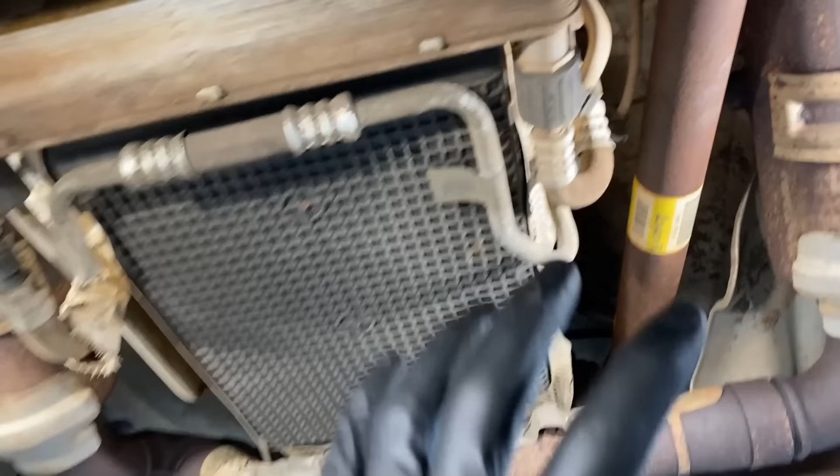All right, first things first, safety. Before you crawl underneath the vehicle, you wanna make sure the vehicle's in park. Use chock blocks, it'll look a little something like that. And then you can generally just slide underneath the vehicle and get underneath here on the trucks, F-150s, Transit vans, maybe even the Ranger, Expedition, and just get to work underneath here, okay?

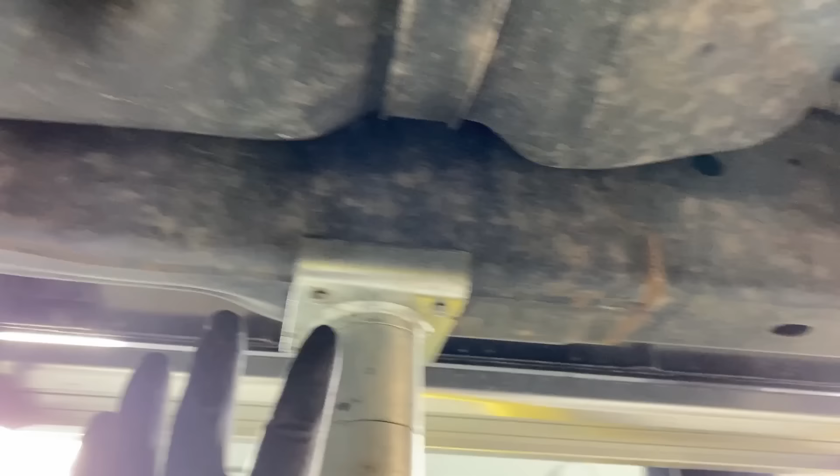If you insist on jacking up the vehicle and having it on jack stands, working on a Mustang, something like that, make sure you put jack stands at all 4 points in the vehicle. So for a frame-based vehicle like this, right here, back here before it arches up, and the same thing over here and over here. Whereas the Mustang, you'll have jacking points in the owner's manual, but basically right around here. Here's the front of the fender here, comes back a little bit, and you'll see a notch in the unibody right there, and you'll jack it up right there on the Mustangs, okay?

Real quick, before we get started, let's go over the differences in the service procedure depending on the vehicle model and engine that you're working on. Yes, the engine matters. So in 2017, when the F-150 first got this transmission, first year for it, it was fairly simple to service the trans no matter what engine you had, okay? You simply had to come in, remove this heat shield on the side here, one here, one here. It's a split design, so it's very easy to take off. These 10 mil nuts right here hold them on, wiggle them out of there, unbolt the pan, service the trans, done, okay?

That all changed in 2018, except for the Ford Raptor. The Raptor was serviced exactly the same from 2017 through at least 2020 and probably beyond. So if you have a Raptor, it's very, very simple to service your trans. Same thing as the 2017 guys. In 2018 with the F-150, it got much more complex, okay? So all of them now have this massive cooler design installed on them, okay?

This big cooler monstrosity on the 5.0, the 2.7 liter Eco, and the 3.5 liter Eco, okay? We need to get all of this out of the way as we're gonna show you here today. We need to drop the sway bar down and get it out of the way. We need to pull the heat shields off, the NVH shield that's up inside of here and clips in right about here. All that stuff just to get it out of the way. On the 2.7 liter and the 3.5 liter EcoBoost, that's it though. You get the cooler lines out of the way, sway bar dropped down out of the way, and you start unbolting the pan to service it.

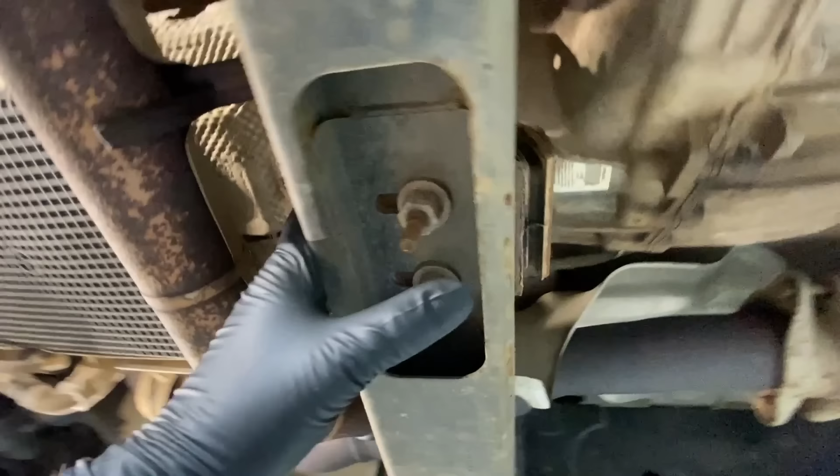Now the 5.0 liter, as you see here, has this monstrosity of coolers and everything. We need to pull the sway bar, the cooler, the lines, everything. But we also need to remove the transmission mount, okay? We have to unbolt it from the side of the transmission here on both sides. We're gonna unbolt this one exhaust bolt right here. I'll show you guys in detail. And then we're gonna lift the whole powertrain up an inch or so just so we can snake the pan down and past the exhaust right here, okay?

In 2018 and on, the Ford Expedition and the Lincoln Navigator received this transmission. And theirs is very similar to the 3.5 liter version of the F-150, okay? So you have to pull all these cooler lines off and the cooler and these mounts and pull the sway bar down. But again, you don't need to lift the trans to pull the pan, okay? And that's 2018 and on. The Mustang and Ranger, stuff like that, those ones you don't need to lift the transmission either, and they're fairly simple to pull up. The F-150, of course, is the worst.

In 2021 on the F-150, the procedure is basically the same, except there is no cooler here. So there's cooler lines you need to detach and kind of get out of the way, but there's no cooler monstrosity here to take out of the way. You still got to lift the trans on 2021 F-150s, but the cooler design has been eliminated, so it's a little easier. Anyway, let's go ahead and get started on this one. Like I said, the 5.0 is the worst one to do, and this will give you a really good idea how to maintain your vehicle no matter what model and engine you have with this transmission in it.

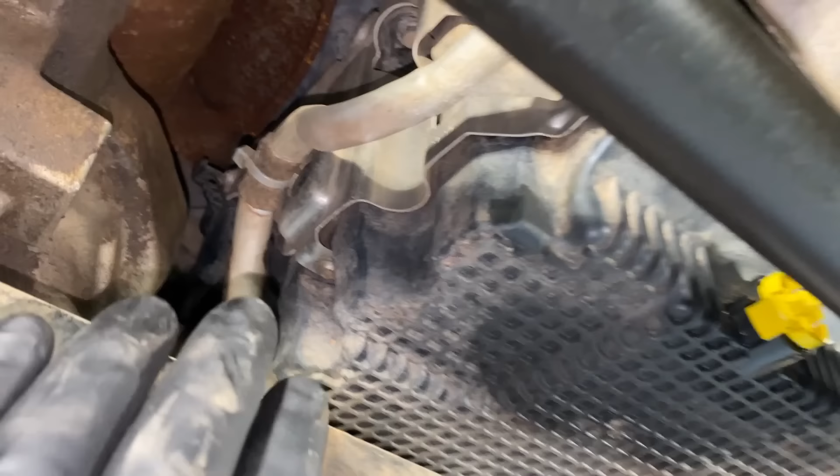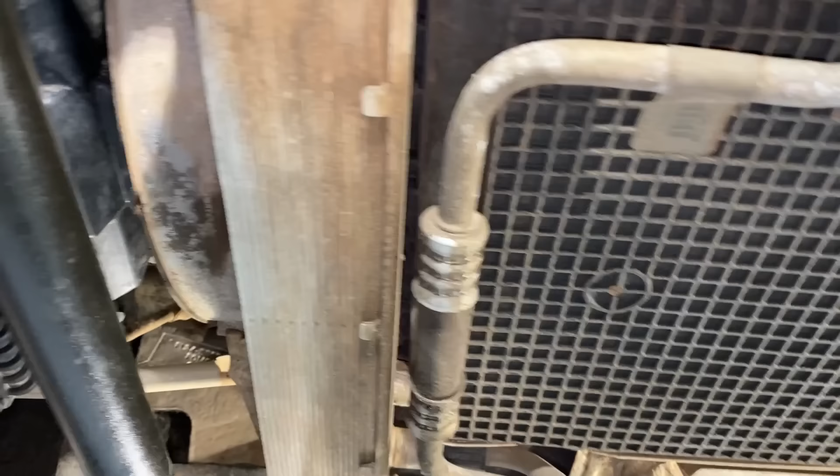You're going to see different attachment points, like right here on the side of the pan is very common. There's little push pins right there, kind of pry them off of there. And then a lot of times the cooler lines will be attached to the bell housing either by a nut or by a bolt, like a bell housing bolt right here in the 5.0. You want to take those bolts out and get the lines loose. Now the cooler, if you have a cooler on here, you're gonna have a 10 mil bolt right there and right there. Take them out, okay?

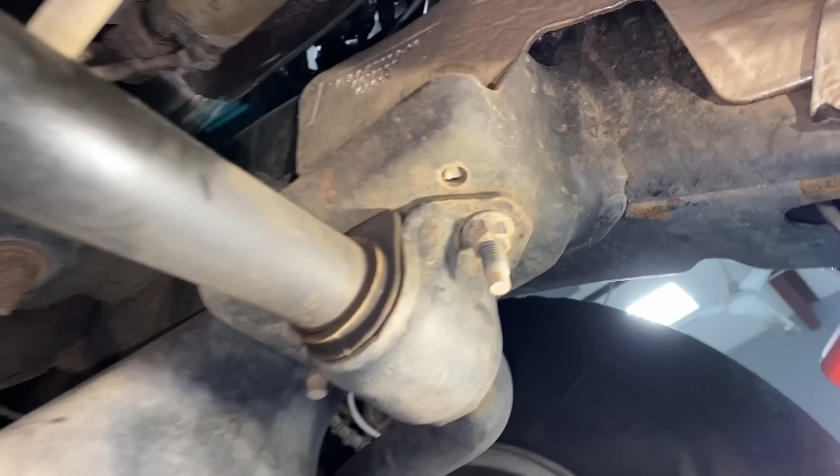Then if you have a cooler also, you need to get the sway bar out of the way. We're gonna droop the sway bar out of the way and we're gonna droop the cooler out of the way, okay? So at this point, if you have a cooler on here, let's go after the sway bar. The sway bar has 15 millimeter nuts on them. You can see them right there. So you want to get 3 of them out and then hold it so it doesn't bonk you in the head and then zing that last one out. Hold it, slowly lower it, and it'll just kind of rest here. Same thing with the transmission cooler and all these different lines.

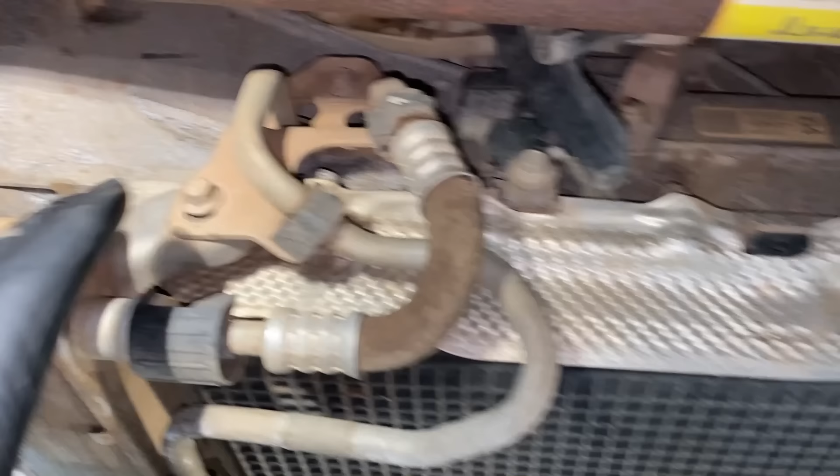They're going to be unbolted and just kind of droop and lay there out of the way, okay? So the last 2 bolts that hold in the cooler and all these different lines that's set up like this are the bolts up here. There's a 10 mil right there, and there's a 10 mil up there to hold this bracket, which actually holds the 2 lines in the side, okay? So we're gonna take these out last.

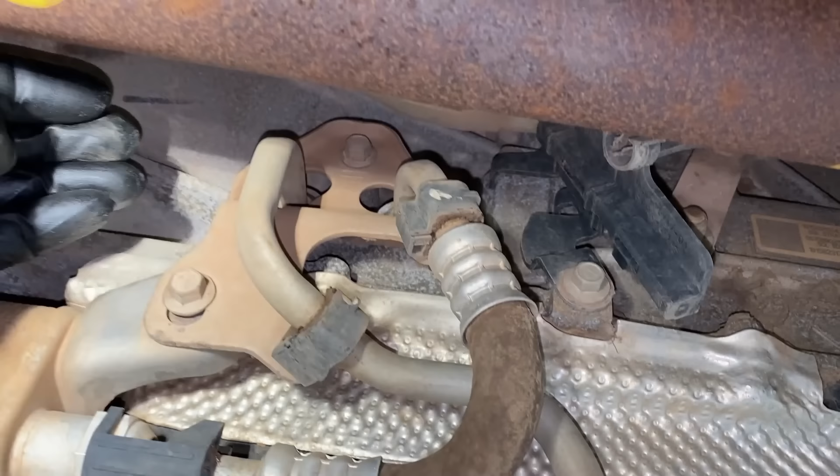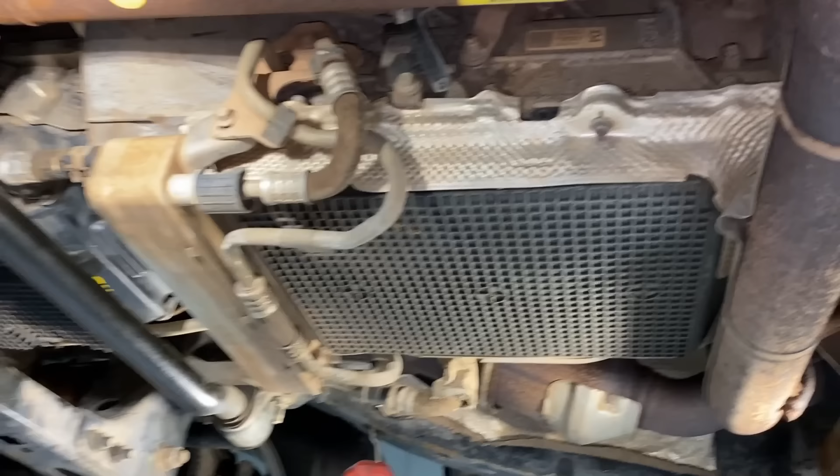Before you take them out, I suggest you get some compressed air up in here and clean it really well around those ports, and then unbolt these, wiggle, wiggle, wiggle, pull them out, and this whole thing is gonna droop to the side. Lots of fluid's gonna come out, so be ready. Then we're gonna go after these heat shields on here. Again, just 10 mil nuts. Just follow them all the way around, and then they come out, no big deal.

And then, again, for the 5.0 models on the F-150, and I believe some 2021 models, we're gonna have to lift the rear of the trans up so we can sneak the pan out past the exhaust there. And I'll go through that in detail, but basically we're gonna pull up this bolt right here for one of the exhaust hangers, and then we're gonna go after the 2 bolts, see them right there on each side of the trans, lift her up, and then we can start unbolting the trans and dropping it down and draining it out.

So first thing I'm gonna go after are those retainers on the side of the pan here. Cat claw works best. Looks like this one was popped off of here already because they changed the pan for the all too common oil pan leaks in these engines. All right, so cat claw for the win there. And then we're gonna go after that 13 mil up top there and get that out of there. I know you guys can't see all of this, but the general idea. It's all pretty simple. It's just access.

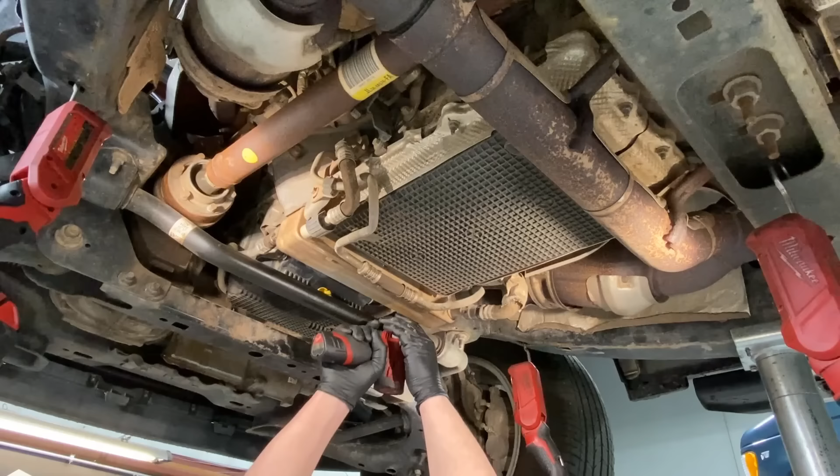All right, so get our 13 mil bolt out, and you can see this line is nice and loose now, so the whole thing can droop. We'll keep all these bolts and stuff like that together. Let's go after the cooler itself. Get that out of there. 10 mil bolts. You can see everything's starting to loosen up on here. All right, so everything's kind of loose.

All right. Like I said, we're going to keep these guys in for right now, and we're going to go after the sway bar. Next, we are going to remove the cooler lines from the side of the transmission. So you can see this one's kind of muddy up in here. You want to use some compressed air all up inside here for a really good cleaning before we actually pull them off there. I already did that on this one, got as much as I could off of there. So we're going to go ahead and pull a 10 mil bolt out.

I like to at least loosen this one because going back together, you want to mount it up to the trans, nice and even both sides, and then tighten this one last so you don't crack the mounting boss on here. So I just loosen this one for now. They can come down together. And then up in here, there's another 10 mil single bolt that holds the cooler lines into the side of the trans. And it's going to be full of Loctite. These suckers are full of Loctite. You see it on there? So it's going to be a little bit hard to get out of there.

All right, now before you just yank the lines away, it's going to be a good amount of fluid coming out of here. So be ready for it. Drain pan down below. And we just got to wiggle and pull at the same time. There we go. Got one line out. And there you go. That's not too bad. But the idea is we want to be able to move it side to side as needed to get this pan out, sneak it out, so it's going to be tough. And you want this down and out of the way.

What do you guys think so far, huh? These are much more complex and involved than the old 6R80 transmissions everyone complained about when they first came out years ago. So now at this point, what I like to do is clean up a little bit.

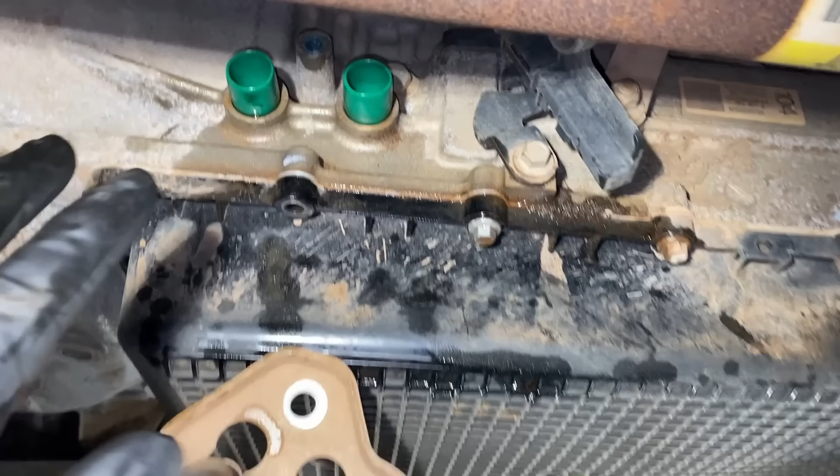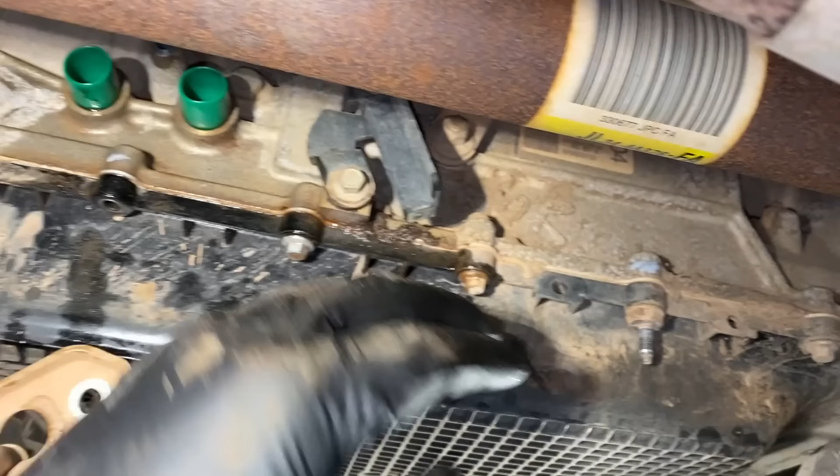So what we'll do, if you pulled off your lines, is I'll cap off the ports in the side of the transmission, and I'll cap off the lines on here so we're not introducing any dirt. And I like to clean up a little bit. We're going to clean with compressed air all along the gasket surface on here. You can see there's mud and everything up inside of here on this vehicle. So you want to clean it all the way around so it's good to go before you break the seal on the transmission. Same thing on the driver's side here.

Right there is the fill port. We're going to loosen that and pull the cap and the dipstick out later on. So you want to get your compressed air up in here and clean it up in here too before we pull that off later on. Okay, so it's time for a little bit of cleanup, and then we're going to go ahead next and unbolt the transmission and lift it up for the 5.0s.

One final step on the 5.0 models is to actually unbolt the transmission from the vehicle, okay? So this applies to the 5.0 models, and I believe all the 2021 F-150 models. That's still to be determined, but that's the way it's looking. The way you do this is you come back here, and you look up, and here's the transmission cross member, and there's a 15 mil bolt right there. So you get a universal in here, and an extension, and you just turn it right out.

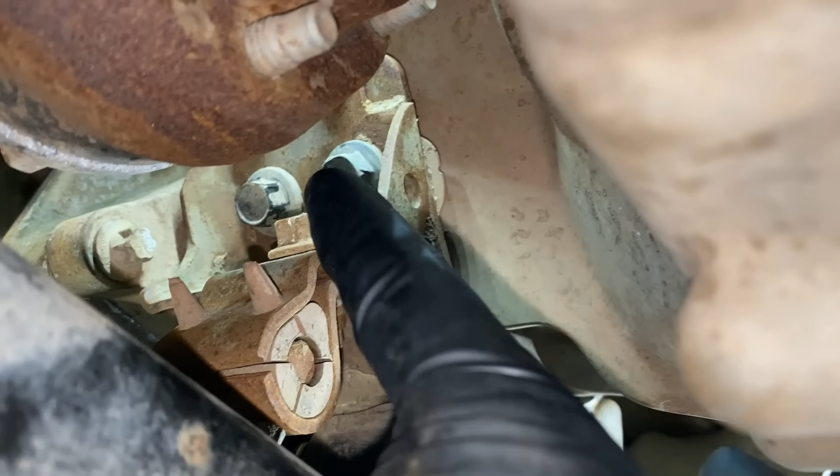On the back side here of the cross member, in order to get to this bolt right here to unbolt the trans, you need to unbolt this bracket for the exhaust. Another 15 mil right there, and a flex head GearWrench is best, and it'll come right out. Get the bolt and the plate out of here, and then same thing. Extension and swivel, get up in there, 15 mil, and take that bolt out.

On the passenger side, same deal. It's just a little bit more open over here, okay? We're simply going to take these two bolts out. So I'll break torque on them, just kind of wrench them out back here, and it'll be good to go.

Once all those bolts are out, you're simply going to lift it up. You're going to use a jack and a block of wood, and that block of wood's going to go right in here, behind the trans pan, on the metal. The case right here. See it right here? Block of wood up in there, and we're going to raise it an inch or two.

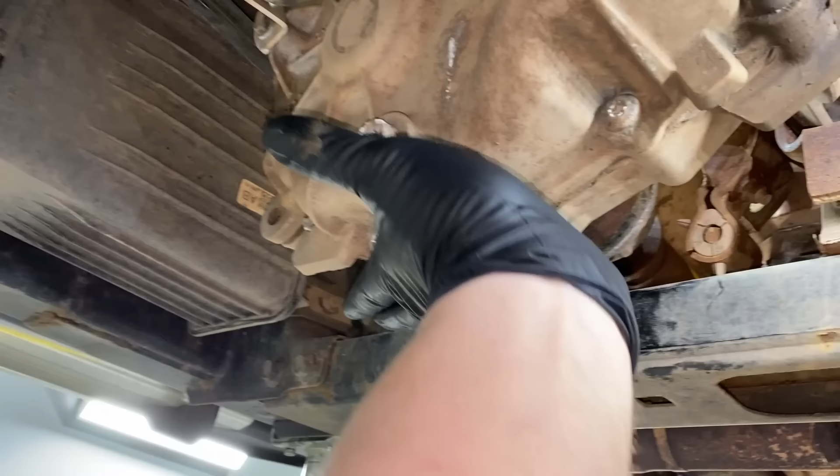What I'm going to do, as we've been doing for years, is lift it back here on the transfer case. We're only going up an inch or so, we're only lifting so much weight, and it'll be just fine, okay? Either way, we need to lift it, and the reason why we need to do all this is we need to create a gap between the exhaust here and the pan.

This pan needs to be unbolted, drop down a little bit, move forward, and get out, okay? You can see it's tight up in here, so we need to create a gap. So with this method, we're going to leave the exhaust where it's at, and we're going to lift the trans and create that gap in the 5.0 models, and I believe all of the 2021 F-150 models. So I'm going to go ahead and create ourselves a gap. I'll show you guys before we start pulling the pan off how it's all going to look in the end.

Once you have the transmission unbolted on both sides, you can safely jack it up about an inch or two. Like I said, I use the transfer case back here. I've been doing that for years on different Ford vehicles, but they want you to jack it up right here at the case, where it's nice and beefy. But in the end, it's going to give you that gap like that. So the transmission went up and the exhaust stayed the same. And that gives us just enough of a gap so we can unbolt the pan, drop it down, go forward, and get it out of there.

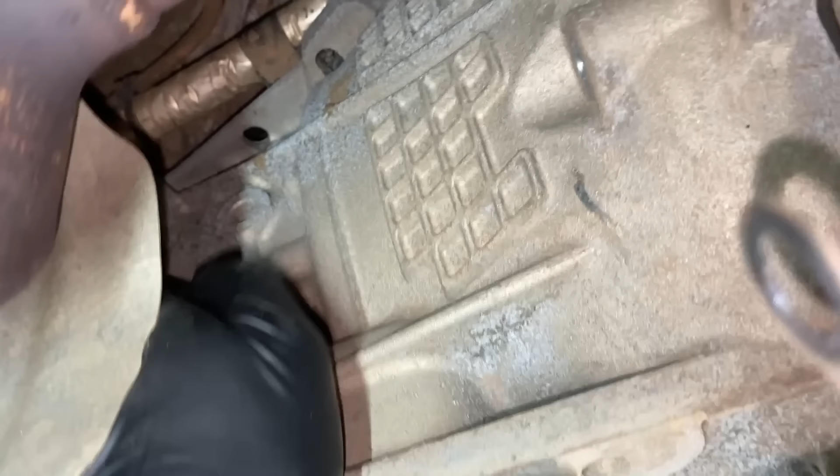All right, at this point, you want to go ahead and remove the fill plug. So you put a 19 mil wrench like this, tap, tap, tap with the hammer, and once it's loose, you can simply unscrew it, like this, and there should be no spill out. Pull it out, and the dipstick and the cap come out. Put it off to the side. Now we can start unbolting the pan. I get the stud bolts out first because they're a different size, 13 mil, and then I go after the 8 mil trans pan bolts.

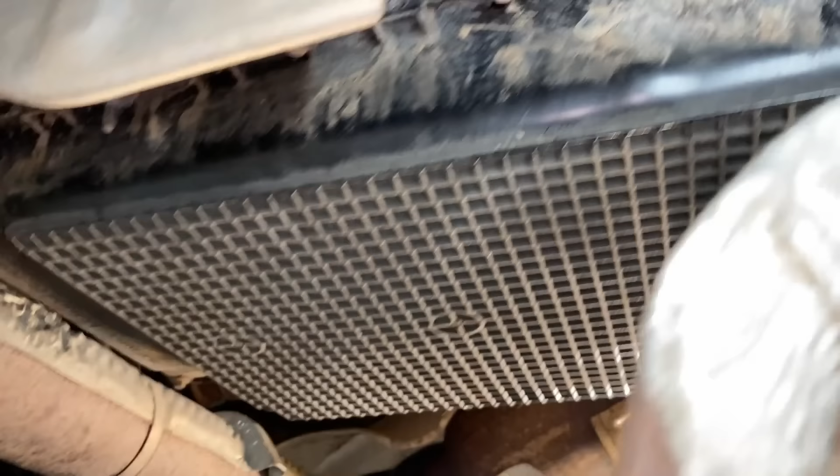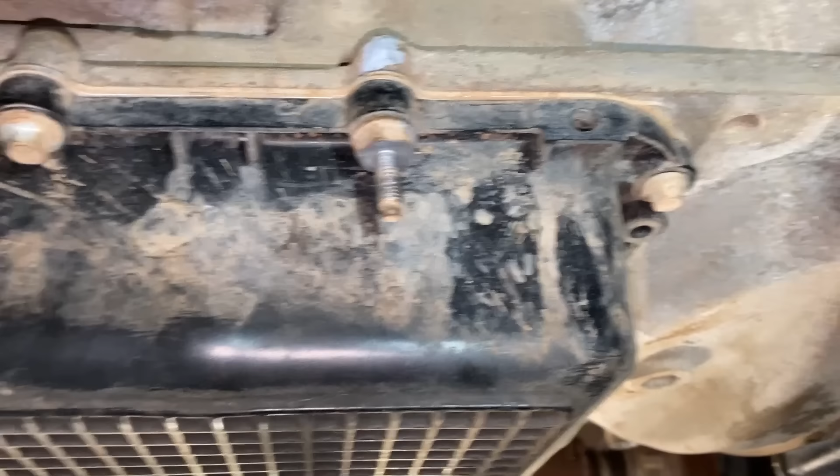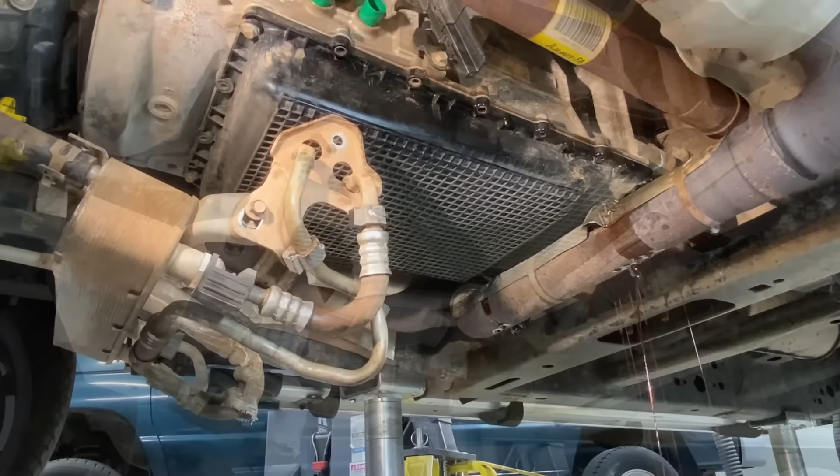At this point, you can see we have a nice controlled drain. It's pretty much done, and we can start loosening these two front corner bolts so the back end can drop down a little more. We get as much drained out as possible before we start pulling the whole pan down in our hands. You don't want to take a bath of this stuff. Bottle's got a big skull and crossbones on it. Danger.

Oh, I forgot one over here. That makes a little more sense. These last ones are good to do by hand. See that controlled drop of the pan. Looks good. I like to hold the pan up like that and let it come down slowly. Drain, baby, drain.

Now we're going to pull you back a little bit so you can kind of see this next procedure. We have the pan drained. We're going to pull the last two front bolts out, okay? And it's gonna be in our hands at that point. But still, it's not that easy to get out, especially with this monstrosity in the way. So we're gonna drop it down. You gotta kind of angle it and pull it out of there and still snake it past the exhaust,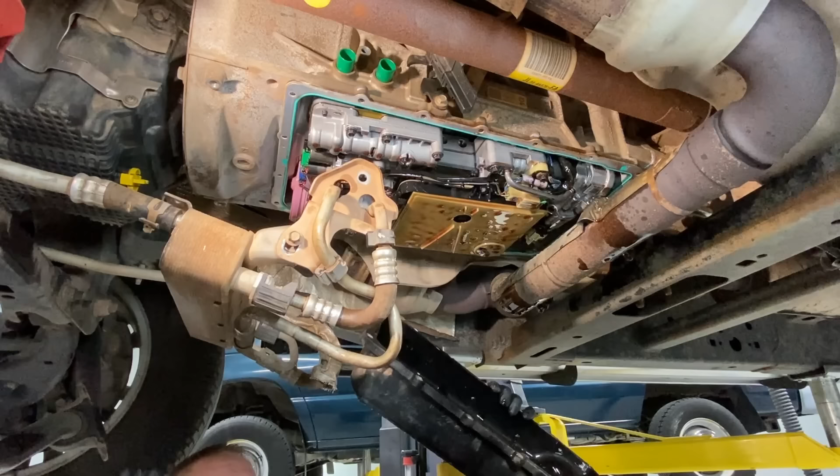Now that we're past the exhaust and we're at an angle, we need to come down and away from the cooler. And that's how you get out of there. You're gonna have to go down, around, and angle it out of there.

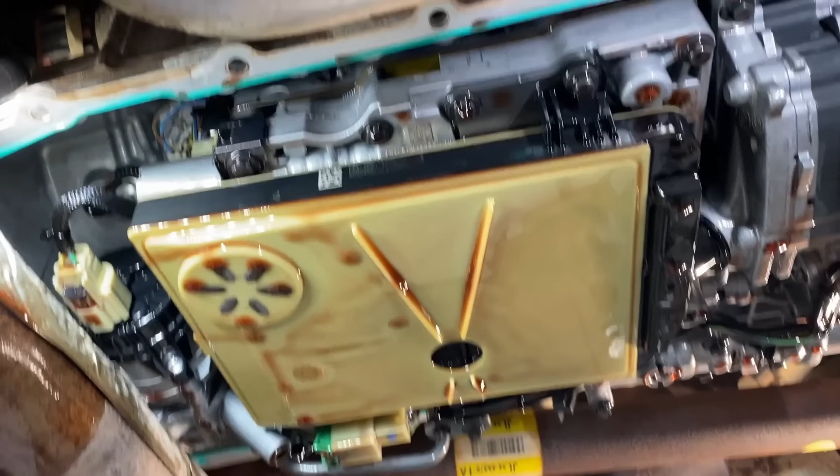Right. Once the transmission pan is out of the way, it's best just to go over and clean it on the bench there while the transmission case kind of drains out. At first, it's gonna be like a rain shower of fluid coming down on you, so it's best just to wait and let it drain out of there. Get a good fluid exchange that way. And then we'll come back and pull the filter down.

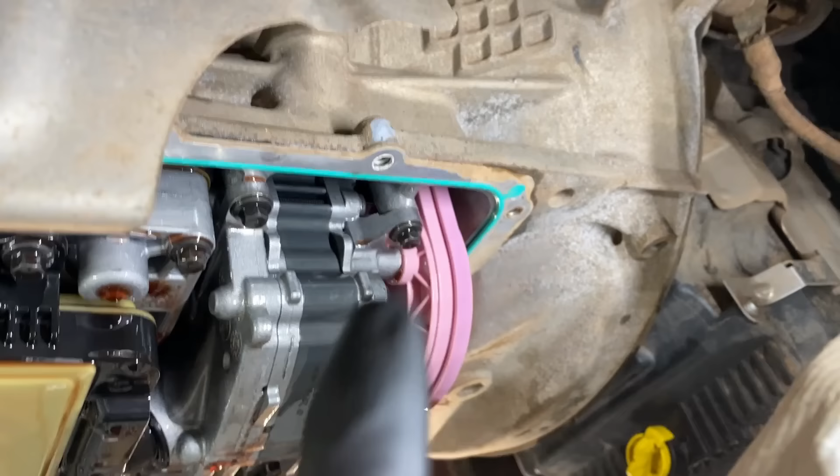So looking inside of this transmission, it looks pretty complex inside of here compared to the old 6R80 transmissions. I mean, it's much, much different inside of here. So I've never seen a main fluid pump like this, where it's external like this and not part of the bell housing up there. I've never seen that. So of course it picks up the fluid from here, comes into here, and then it shoots out of here.

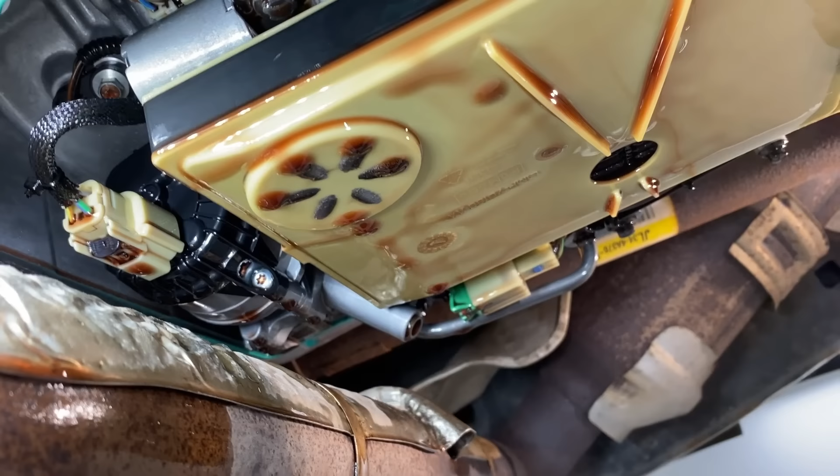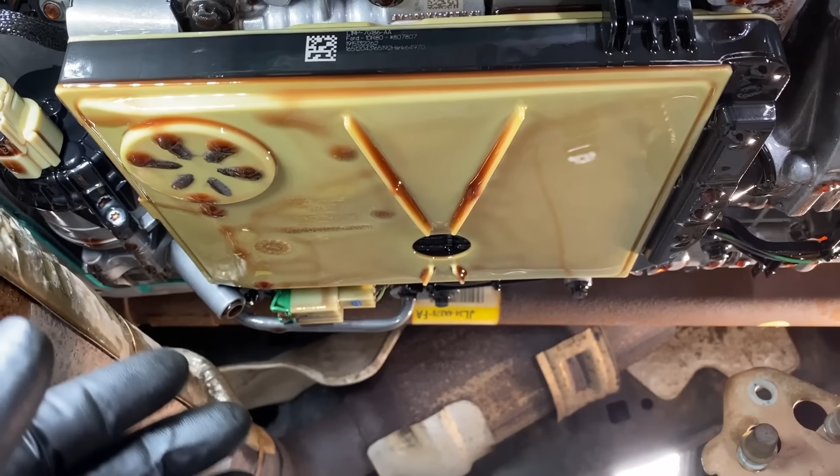On this side over here, there's an auxiliary electric pump, and that's for the start-stop feature, so it keeps line pressure. And even the filter on here is unique. So most of the filters out there have a coarse media inside of them to filter the big particles out of the fluid, okay? Whereas this one has a coarse media right here inside, has its own magnet, and then this whole front section here is a real fine media for catching all the little finer particles than was ever caught before on transmissions of the past.

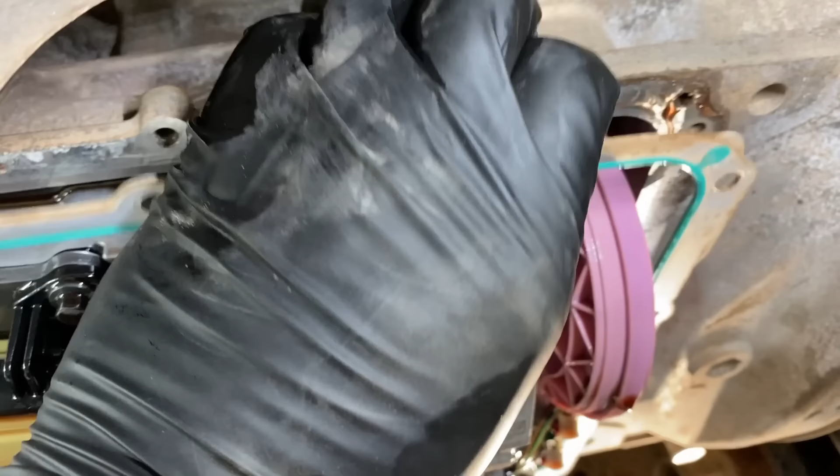So it filters it much, much finer because, as you can imagine, there's a lot more in here to wear out, and it's much more sensitive to anything floating around in there. So at this point, I'm gonna go ahead and pull the gasket off of here. It's gonna usually be stuck on here, coming down, get it out of there, and then we're gonna clean the pan out, and we'll come back for that filter.

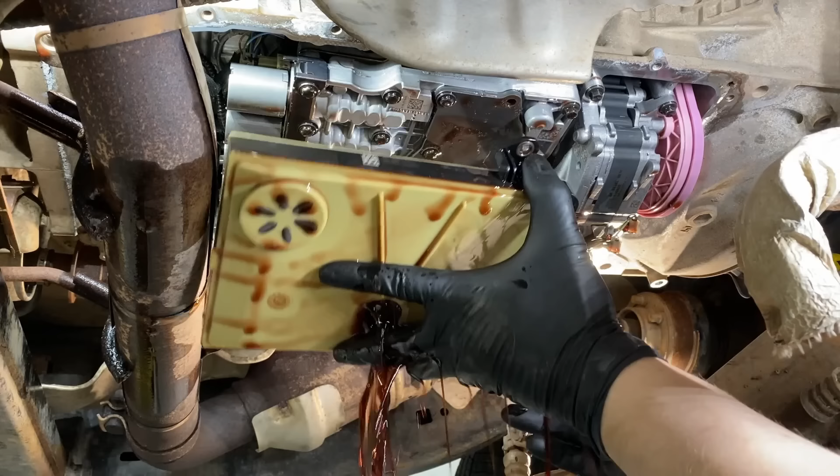Now it's time to pull the filter out. So there's two bolts, one here and one here, the 8mm. They're holding it in. Okay, so we'll pull this one out. There's one right here. Woo. This one is much longer. Kind of pull it out like that. Let her drain. Now it's time to start putting the transmission back together.

So the first thing we're going to do is install the transmission filter. Now when you took your old filter out, you may have noticed it took the seal with it. 90% of the time, it's going to remove the seal with it. Very, very important that you put a new one on, okay? So I have a new one here, and again, I'll list all these parts down below. You're going to put it in just like that.

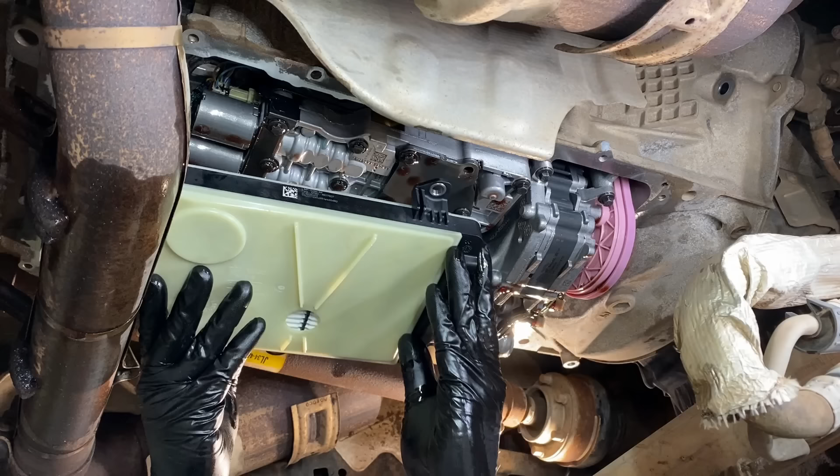Okay, and then we're going to take our new filter, we're going to get it in here, and we're going to push it up in there. It's going to be a little tight, that's why it came off initially with it, and that'll kind of hold it, and then we can start bolting it in. What you want to do is get these bolts started by hand. Finger tight like that.

Remember, the short one goes over here and the long one goes over here. Get it in by hand, a couple of threads. Good to go. We'll make sure we push it in all the way. Looks good. Okay.

And then we're simply gonna snug these up. Just get them snug on both sides. Just like that, everything looks good. Our seal's still in place. Perfect. And then you wanna torque these bolts to 96 inch-pounds. These two bolts for the filter, 96 inch-pounds.

Now with the new filter and seal installed, we have both bolts torqued to 96 inch-pounds. We can go ahead and start putting the pan and gasket back up in there. So I'll do one last cleaning with some brake clean sprayed onto the rag, and I'll clean the surface up on there. In general, the surface where the gasket is actually sealing to, you'll see it, it's like brand new and shiny. That's the area you need to concentrate on. The corrosion around those points, you don't need to worry about because that's not a sealing point. So just make sure it's nice and clean.

One nice and unique feature of this transmission is the pan gasket actually has these little retainer nubs in them at the left rear of the pan and the passenger front of the pan here. So it'll actually hold the pan gasket in place. As you can see, it's a little tight getting up in here, especially with the cooler coming down and everything else. They already know that, so they're making it a little bit easier on us. So we can get it up in here, get it lined up, and it'll hold it for us while we're installing the pan.

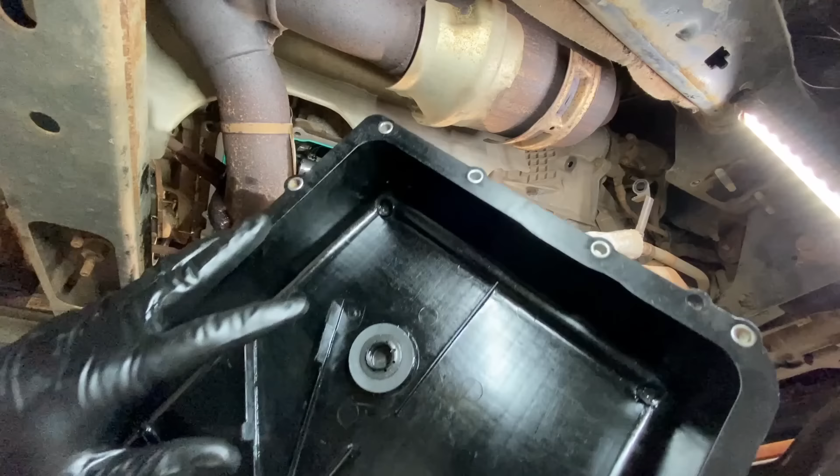Now these pan gaskets are reusable. If they're taken care of, you generally should never have to replace the pan gasket. They'll last the life of the trans. All right, good to go. Next, we're going to install the trans pan itself. I have the inside nice and clean, gasket surface nice and clean. The magnet is retained in part of the transmission pan, so you don't want to try to take it off, you just want to clean it in place. Everything on here is good to go.

So what we're going to do now is install it up onto the transmission. Go ahead and zoom you in a little bit here. There we go. We're going to try to go in the same exact way we came out, so we're going to come in this way and try to avoid anything so we don't drop any dirt inside of here. Come up past it right here, get it up on there and get it lined up. Okay. And then we're going to start putting a few bolts in. Remember the location of these stud bolts so you don't mix those up.

I usually get one on each corner here going. You want to thread them in by hand so you don't cross thread anything. There's going to be some corrosion, stuff like that. There we go. Kind of shake the pan around a little bit like that. That'll help line the bolt up. And sure, why not? Back here in the corner too. Let's kind of hold it up like that, and I'll just snug them up. Just enough where they're holding the pan. They're not actually sucking it to the case.

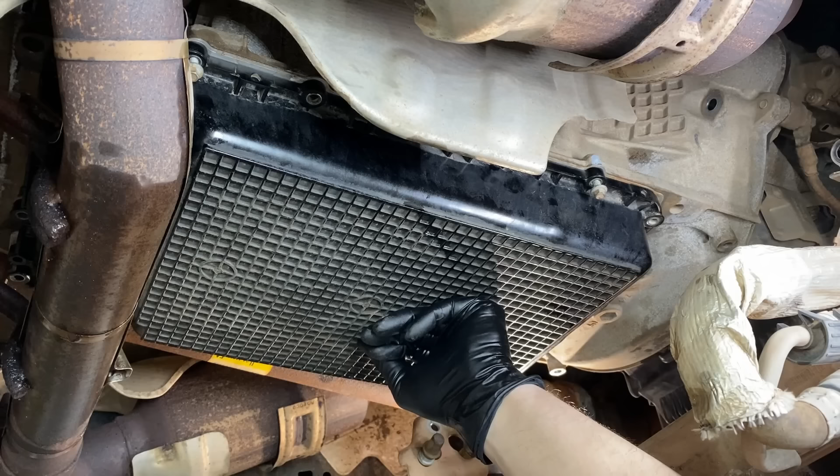You want some movement of the pan so that you can line up the rest of the bolts. See, it's a little too tight, so we're going to have to back these down a little bit. You see I can move it like that? That's perfect. And then we can go ahead and start putting our stud bolts in and our regular bolts and get them all tightened up on there.

You can see right here, I have it marked for a stud bolt. So that's wrong. And that's why it's nice to mark the case like that. That marking will be there afterwards, so we know where they go. Stud bolt. Once you get all the bolts back in here, a couple threads by hand so we know we're not cross-threading, and you have them in the correct locations marked earlier,

you want to tighten them down in a crisscross pattern, okay? A crisscross pattern looks something like this. So you're jumping around, okay? That'll kind of even the load on the pan as you torque it up. What I do is a swirl pattern. I'll start off in the center and I'll get bigger and bigger and bigger. So we're tightening up from the center on out. You want to torque them down to 96 inch-pounds for this style bolt and 106 inch-pounds for the stud bolts, okay?

And that'll complete the torquing sequence for the pan. When I'm done torquing everything down, I'll go through in order all the way around and I'll recheck the torque on there in case the gasket has set. Okay, now the pan installed, torqued down, wiped clean, we can go ahead and start putting things back together.

The very first thing you want to install, especially if you jacked up your trans like we did, is these heat shields right here on each side. It makes it very easy to get them in and out while it's jacked up like that. So go ahead and install those with the nuts on there. And then next, you want to start lowering the transmission back down. If you jacked it up, it'll lower right down just about perfect into the cradle here.

Get your bolts in there and lined up, finger tight, so everything's all lined up and good to go. And then you can drop it down all the way and we can go ahead and tighten them up. You want to use blue Loctite, medium strength Loctite on these two bolts on each side. And we're going to torque them down to 76 foot-pounds, okay? Once it's back down and good to go, you want to go ahead and put the other side of the clamp here in the bolt right there and torque it down to 41 foot-pounds, okay?

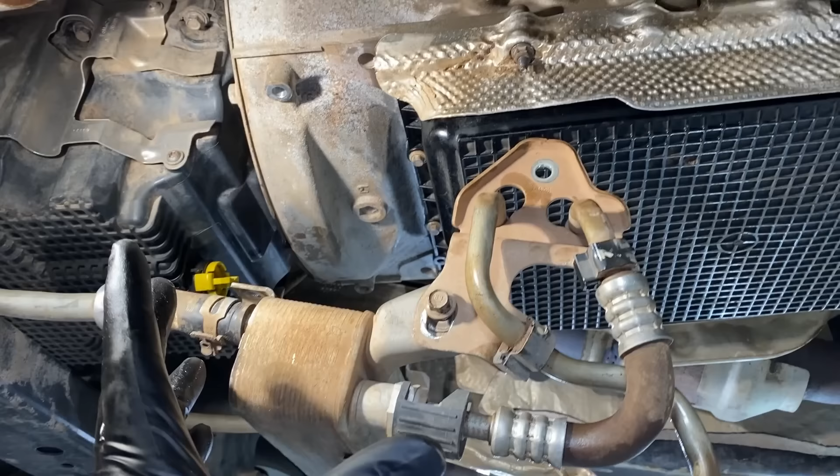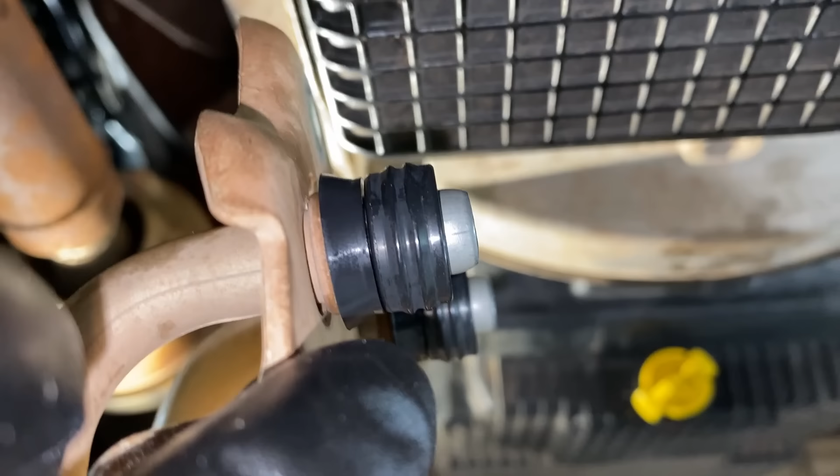And then we're going to come back over here and start putting the cooler and the lines back up, okay? So we're going to get the lines and the cooler back up. We're going to put the two 10 mil bolts back in, 22 foot-pounds. We're going to install new seals on the lines here. You see how it has the chamfer? Has that chamfered edge on it like that, and then the new seal right there, and that'll make sure it pushes it right into there nice and square.

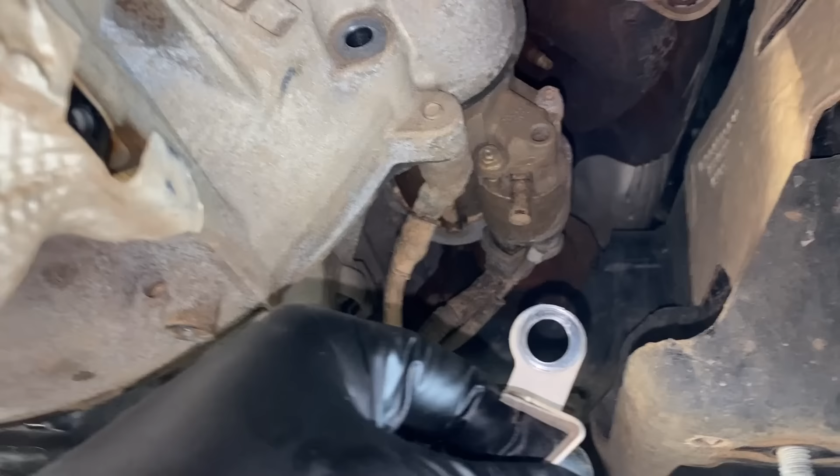So we're gonna go ahead and put it all back up into place, and we'll tighten this bolt and this bolt down to 22 foot-pounds. Make sure you use the blue Loctite on those bolts. And then of course, reattach your cooler lines as needed going forward on there. Of course, in the 5.0, we have the bellhousing bolt. That's 35 foot-pounds. We're going to put that back in here. Just get everything back together on here so we can start filling it up.

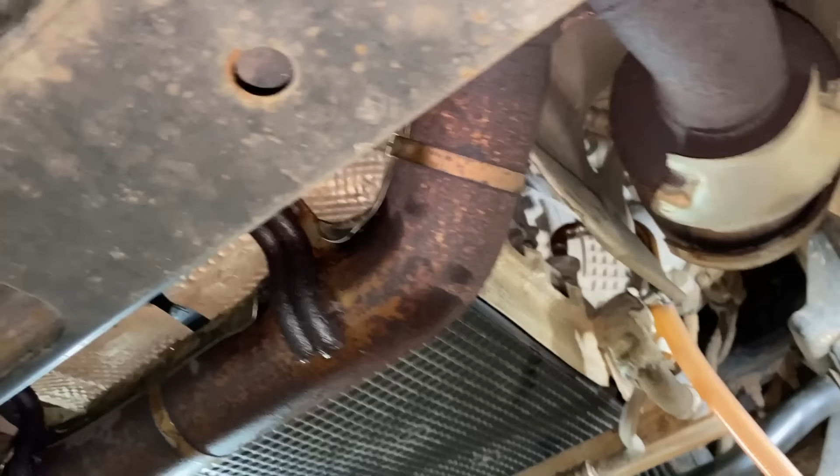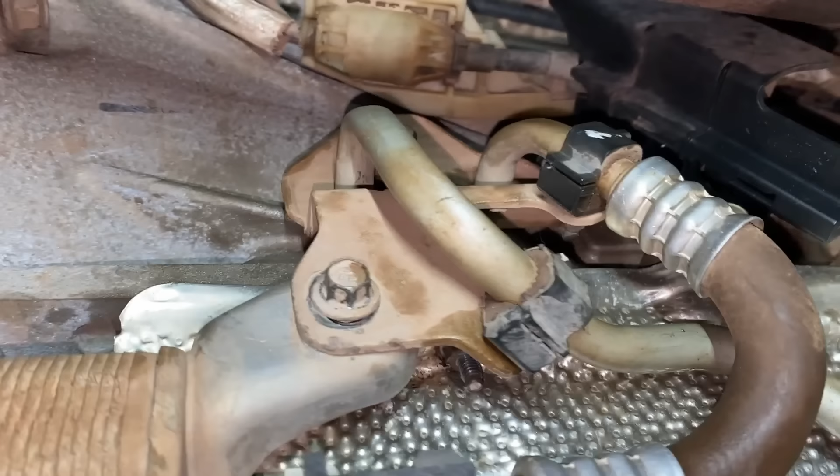After all that, it's finally time to start filling the transmission up so we can finish this job. Before you do that, though, you want to take a quick second to look around at everything we touched, especially in the 5.0 models, because we touched so much. You want to make sure everything's back together, tight, and good to go before you start the vehicle up and get it hot. Check everything over, make sure your seals are back in place, all your bolts are tight. If you pulled your sway bar down, put that back up, get the nuts started on there, and then torque them down to 41 foot-pounds.

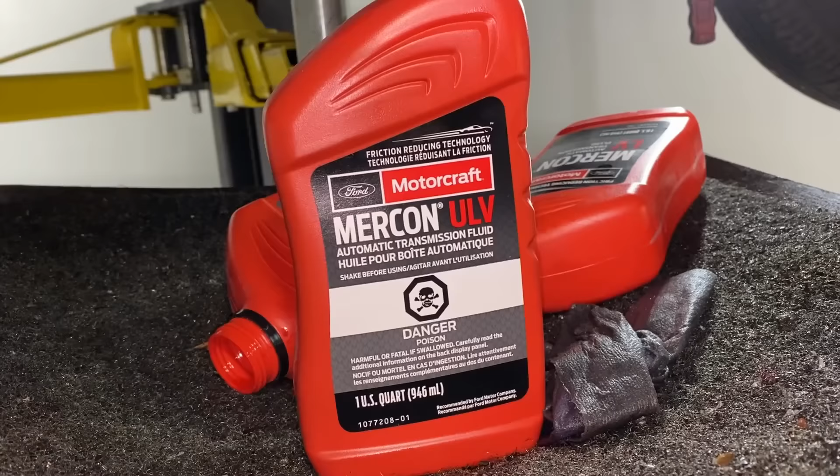All right, let's go ahead and fill the transmission up. Now, the fluid you want to use in this transmission is the Mercon ULV, the ultra low viscosity fluid. You must use this fluid, okay? So make sure you have around 8 quarts on hand. And we're going to do everything right through this fill port on the side of the transmission. We're going to fill it, adjust it, and check it with the little mini dipstick.

Yeah, right next to the cat converter right here. Fun times. So hopefully you're not doing this in the middle of summer.

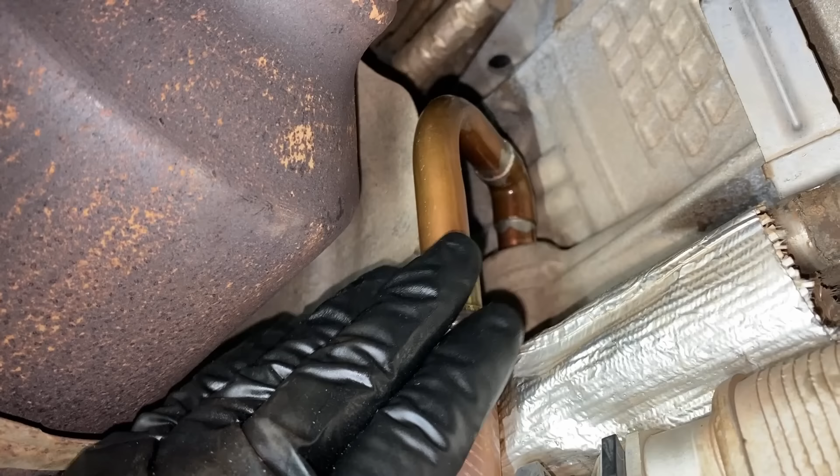So an initial fill of 5 to 6 quarts into here, and then we can go ahead and start the vehicle up safely. We'll go through the gears, and then we'll put it back in park, leave the engine running. We'll come back down here, and we'll start adjusting the fluid in park, running, and we'll adjust it from there.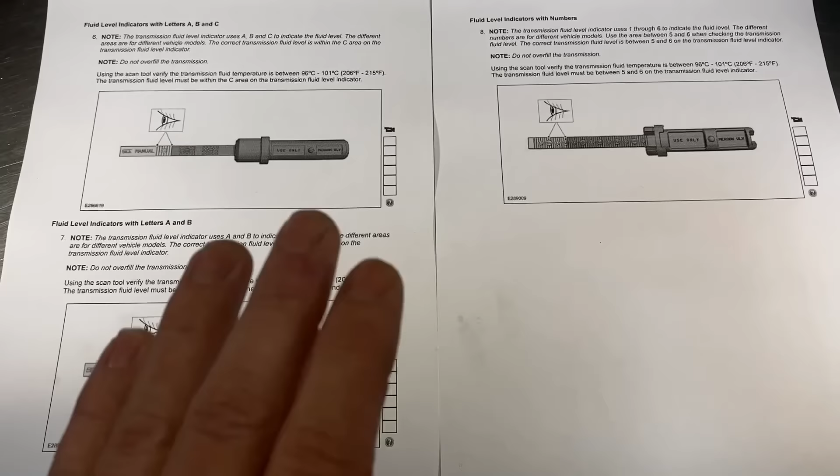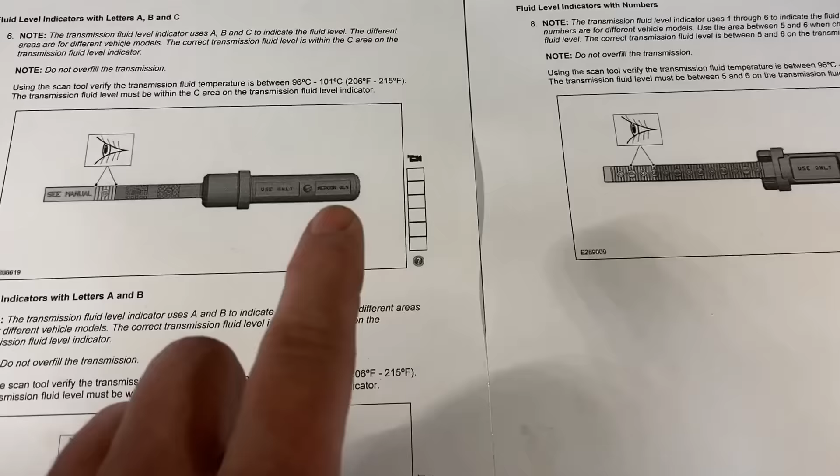Now that it's time to adjust the fluid level in the trans, let's talk about the dipstick, okay? You may have one of the 3 different style dipsticks depending on your model and the engine that it's attached to. And all of these markings on here are for when the transmission is full hot. So the fluid's expanded, full hot, I mean smoking hot, 206 to 215 degrees. We're going to adjust the transmission fluid level when the vehicle's cold.

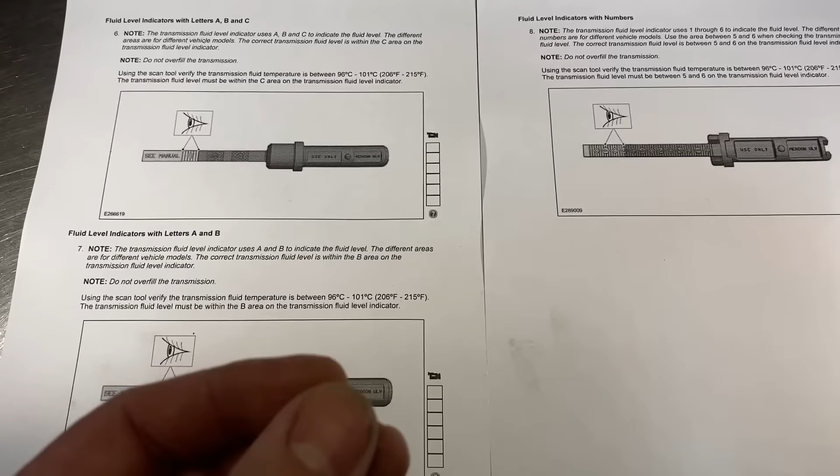So we're going to start the engine up, we're going to put it through the gears, we're going to come right back underneath, and we're going to check and adjust the transmission fluid level. So we need to modify this a bit, okay?

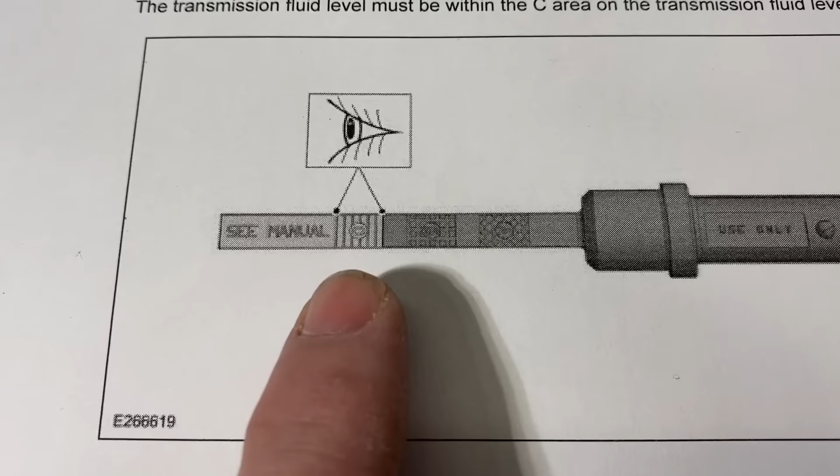So you may have a dipstick that has an A, B, and C marking on it, as you see here. Okay? This is the marking that they want you to be within, C on here, okay? This is full hot. So we need to be below this, like a box below it, right below it. And then as it expands and heats up, it'll come right into this full hot operating temp right here, okay?

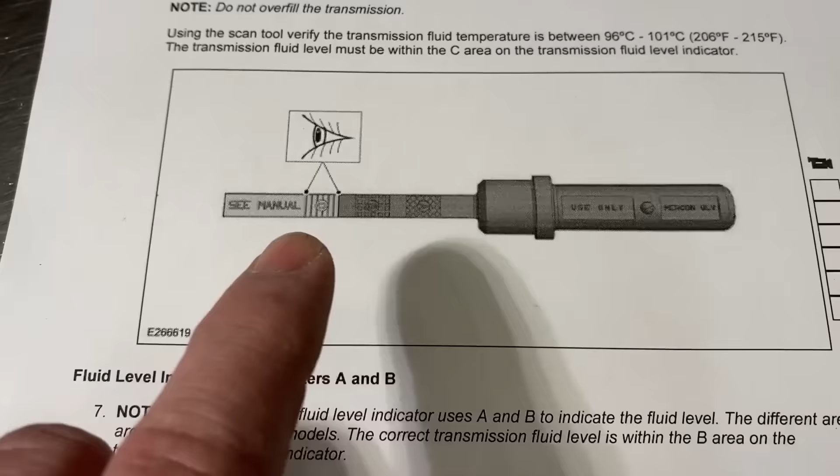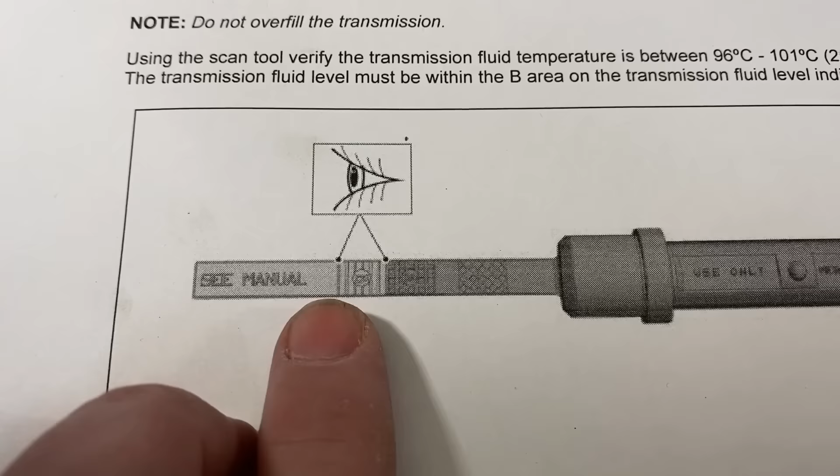You may have an A and B only dipstick, okay? Same thing. Right here is B. You want to be just below it because the fluid is still cold. So somewhere in this region right here, a box below the B in there. And as it expands, it'll come right into it.

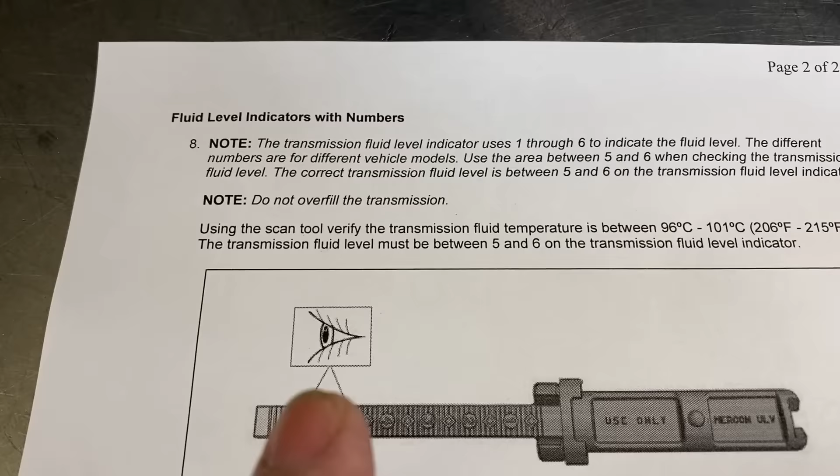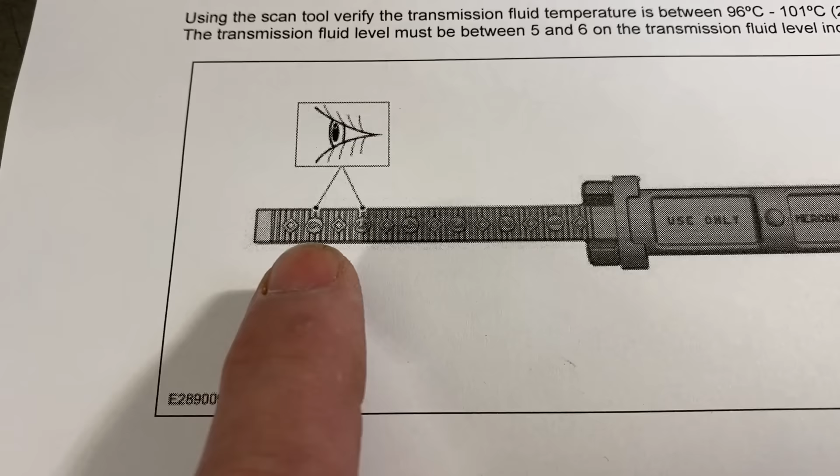This transmission that we have here has a numbering system. Yes, it's crazy. So the fluid indicator may have a bunch of numbers on it, you can see on here. And they want you to be between 5 and 6 on here. So again, we're going to be more like the 4 to 5 area on here because it's cold. As it heats up, it'll be in the 5 to 6 region on there. Okay, that is the way to do it.

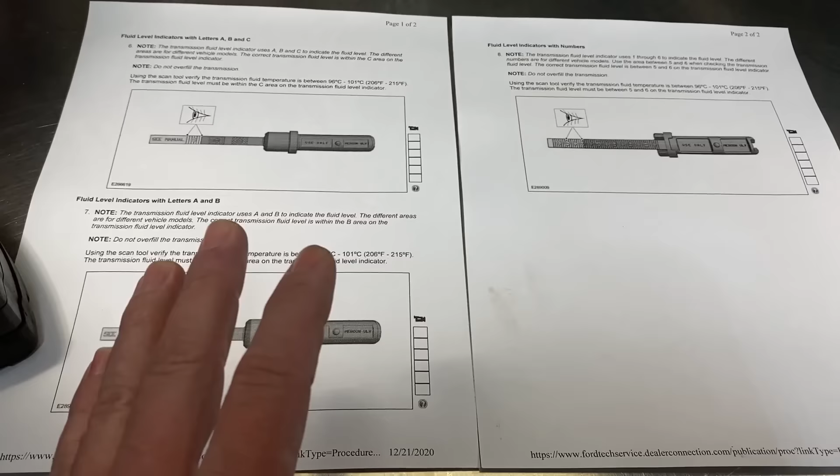And I'll also link to these down below so you guys have a reference. You can print them out, have them by your side, and you can adjust your fluid level absolutely perfect on your trans. Let's go over and check the fluid level and see where it's at.

After the initial fill of around 6 quarts of fluid, you can go back up topside there and start the vehicle up. Let it idle down a little bit, put it into reverse, 10 seconds, neutral, then drive for 10 seconds, back to neutral, back to reverse, and then back to park. Let it idle down a little bit. We come down here and check our fluid level.

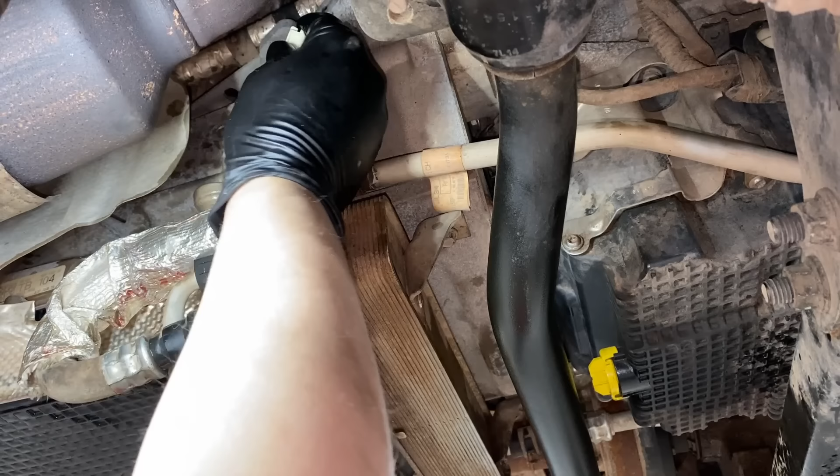Now for me, it was right around 7.5 quarts total to get my fluid at the lower portion on here, okay? So we're gonna take our clean dipstick. We're gonna go ahead and put it inside of here. Lights are dying. Make sure you get all the way down inside of there. See, I wasn't all the way down in there. There we go. And then we can go ahead and check our fluid level.

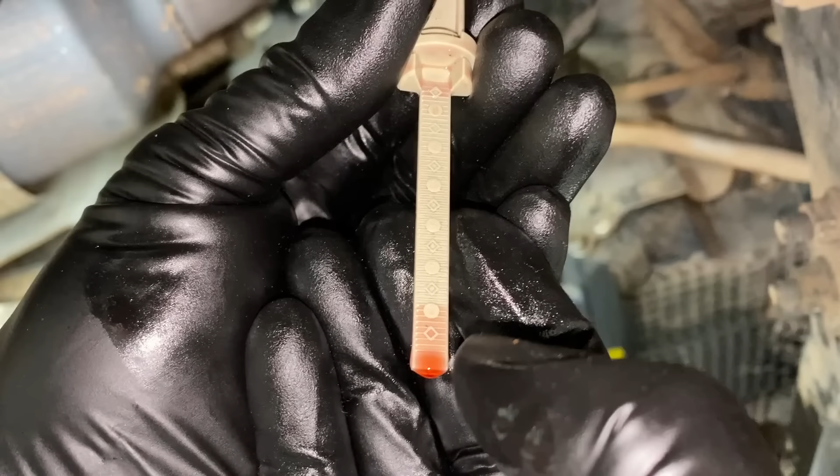So on this one, it has a number system, okay? Which means it should be between 5 and 6 down here. We're cold right now, so we're right below it, right in this area right here. So that's perfect. And as the fluid gets hot and it expands, it'll be right in the 5 to 6 region right here. Perfect for full hot check on there.

You don't need to perform this check on a full hot transmission. Just go to the box below it, and when it expands, it'll go into the proper box for full operating temperature on there. So at this point, we are good to go. I've checked it a couple different times on there. Everything looks good to go. No leaks. We can go ahead and put our dipstick in there and our cap back on.

Just like that. Make sure you screw it in by hand. Should go all the way down by hand. Just like that. And then we'll just use the open end of the wrench to just kind of snug it down. Don't need to crank this down that much at all. All right, that's it. Filled and adjusted on there.

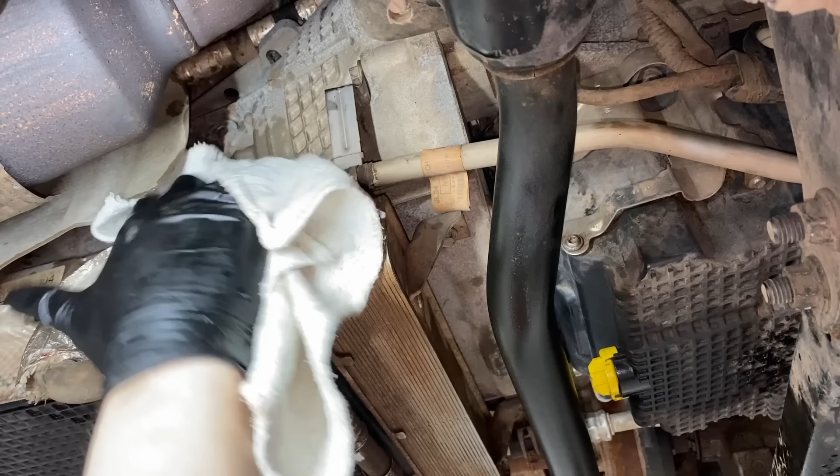Wipe it down a little bit. You're bound to spill some fluid in this area, so it's good to get a hose and some degreaser under here afterwards and clean it up real nice to make sure you have no leaks. All right, so everything looks good to go. Again, with it done like this and everything's back together, it's running. We have pressurized fluid in the lines. You want to check your cooler fittings over here. Make sure there's no leakage. So everything's good to go.

What do you guys think, huh? It's pretty complex. It's pretty involved. There's a lot of variables here. But hopefully I went through them all for you guys today. And this covers your vehicle, model, and year. As you just saw, there's a lot of differences out there. But the basic general procedure, dropping a pan, changing a filter, filling and adjusting fluid is basically the same as the 6R80. But there's a lot of other parts to getting to it, having the right fluid, and making sure everything's good to go in the end.